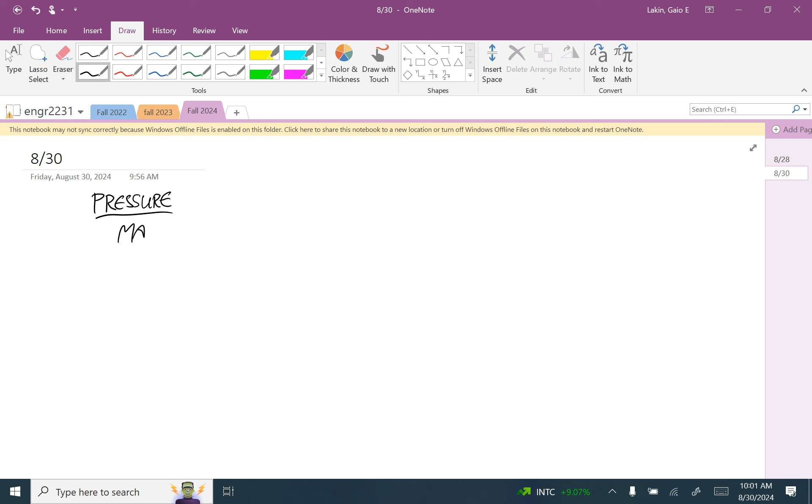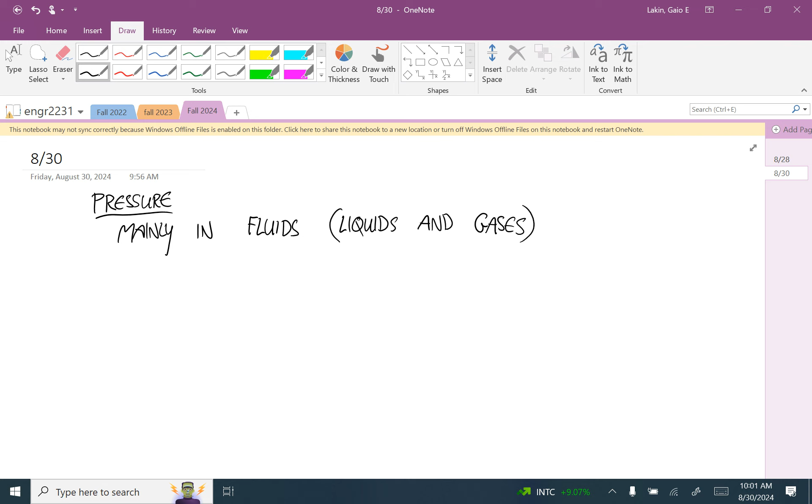Okay, pressure. So when we talk about pressure, this is mainly in fluids. And when I talk about fluids, I'm talking about both liquids and gases. And pressure is the force divided by the area that's applied perpendicular to any surface.

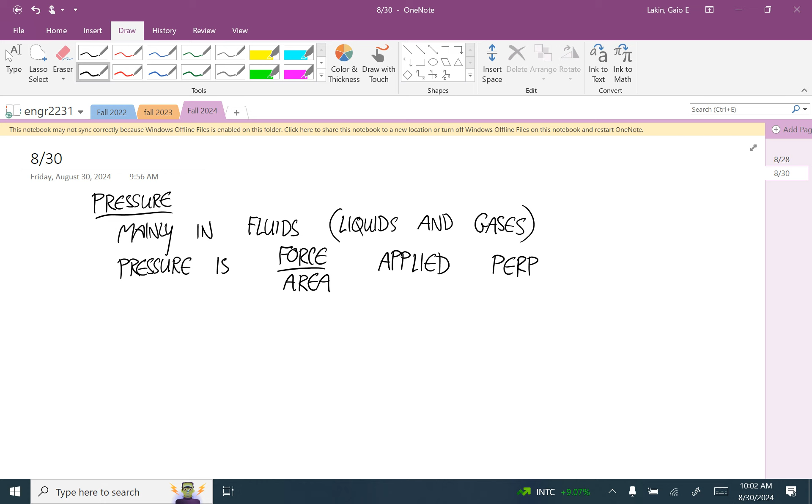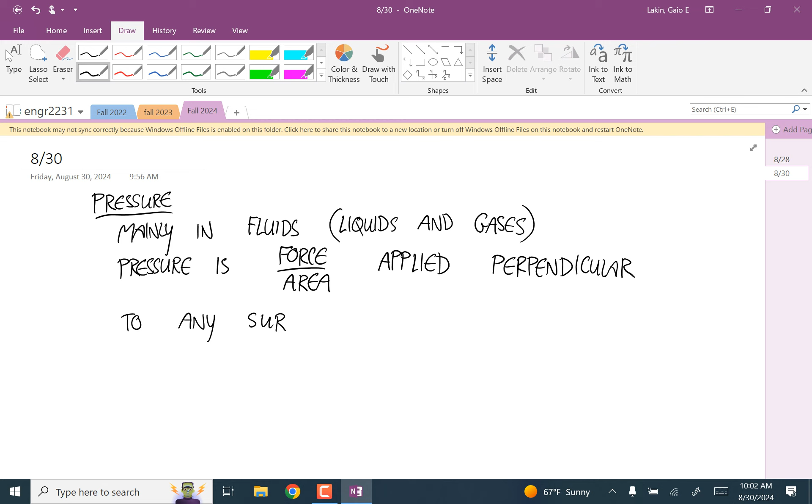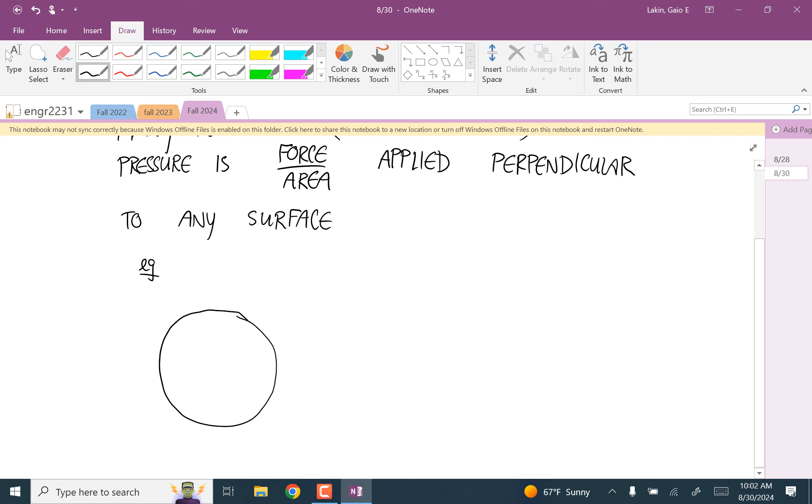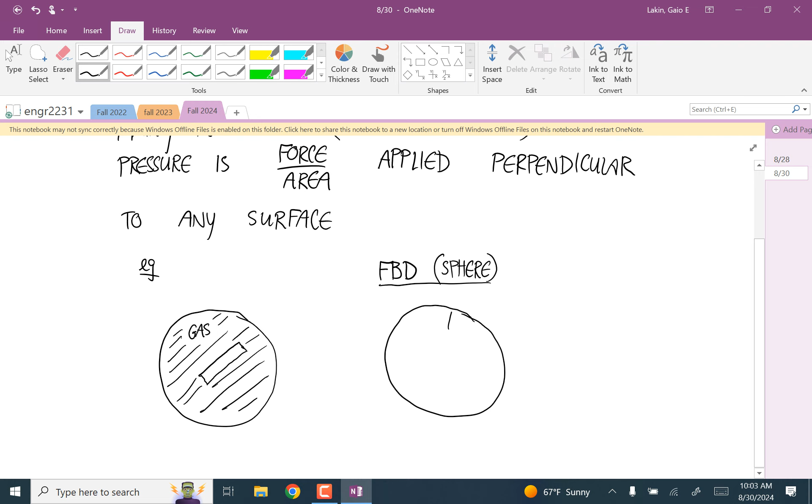So, for example, if you had a pressure vessel, like a spherical pressure vessel with a gas in it, and then inside you had an object like that. Okay, so the gas is all this here. Then a free body diagram of the sphere would look like this. At every point, that pressure is pointing perpendicular to the surface.

And if you looked at a free body diagram of the object that's inside there, the pressure is applying forces perpendicular to every one of those surfaces like this.

You have kind of this vague sense that pressure can be a force or suction can also be a force, but you need to start getting your mind used to the fact that all there is are differences in pressure, and all pressure can do is push on things. There's no such thing as suction. It's just differences in pressure.

So if you imagine sucking the air out of an empty plastic pop bottle, you feel like you're sucking the sides in. But what you're really doing is, when it's sitting there, it's in a tenuous equilibrium that comes from atmospheric pressure pushing in on the sides and the atmospheric pressure inside pushing out.

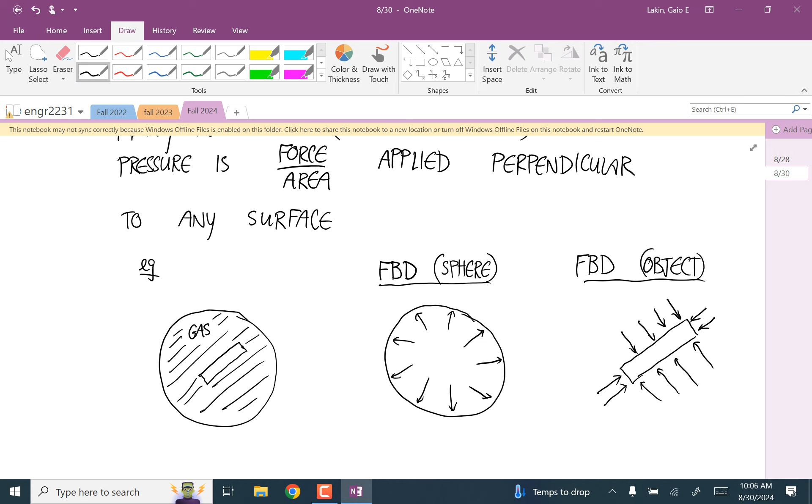Okay. Same thing with if a door blows off an airplane or a window or something. So in order for people not to die in airplanes, they pressurize the cabin. They don't pressurize it all the way to ground atmospheric pressure, but that pressure is a lot higher inside the plane than outside. And so if a door flies off, all of that high pressure air inside wants to get outside, and that's what takes things and people out the door of an airplane.

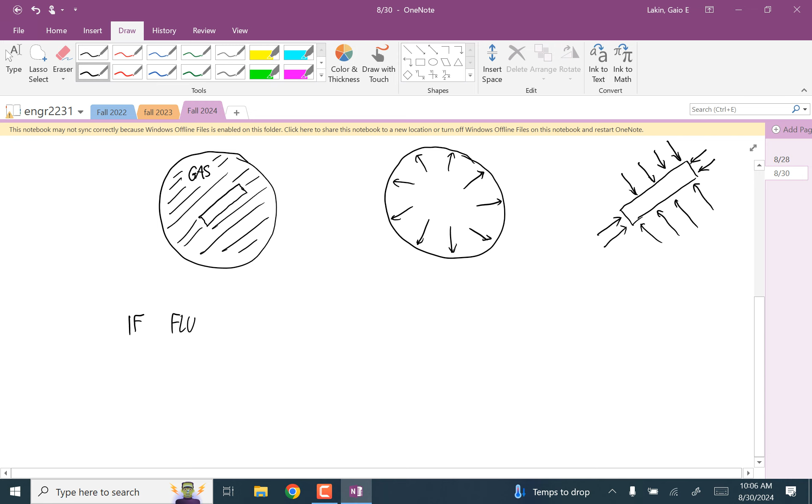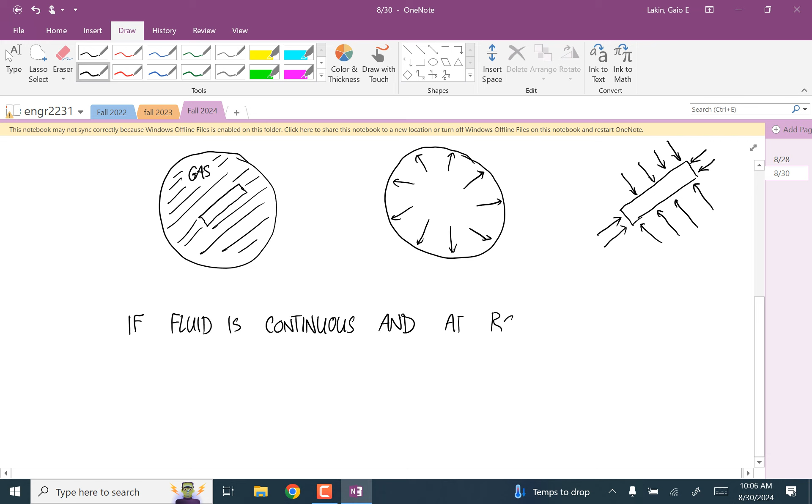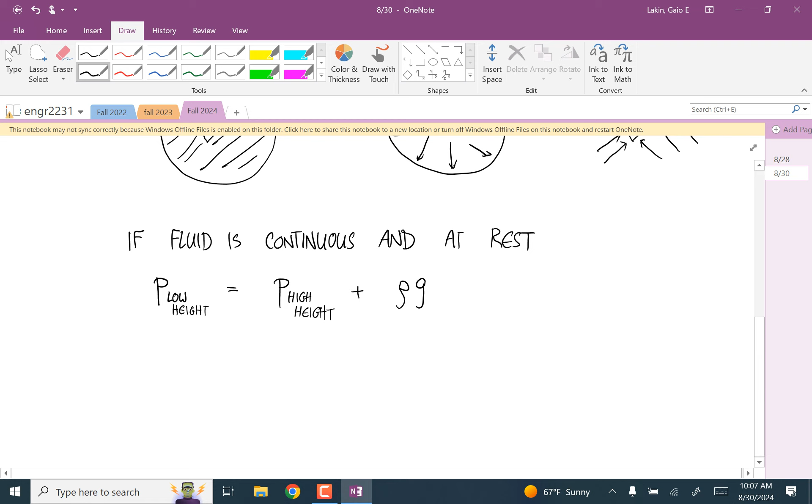If a fluid is continuous and at rest, you can calculate the pressure due to a change in height this way. So the pressure at the lower height is equal to the pressure at the higher height plus the density of the fluid times g, 9.81 meters per second squared, times the depth. I'm calling it h for height.

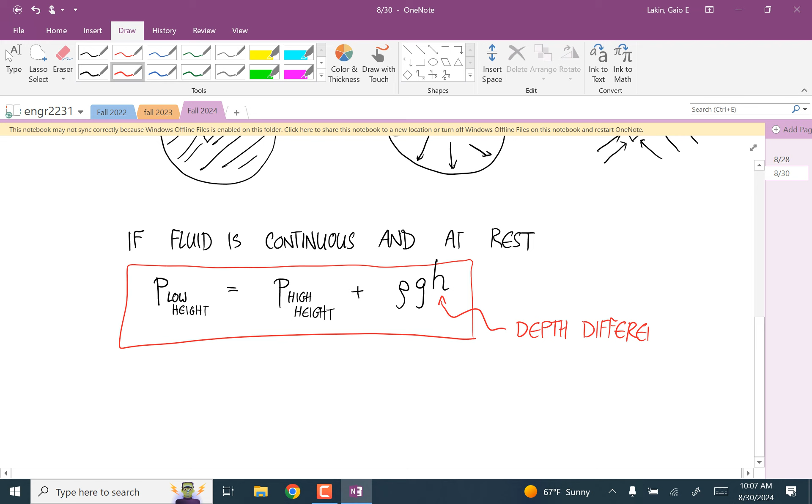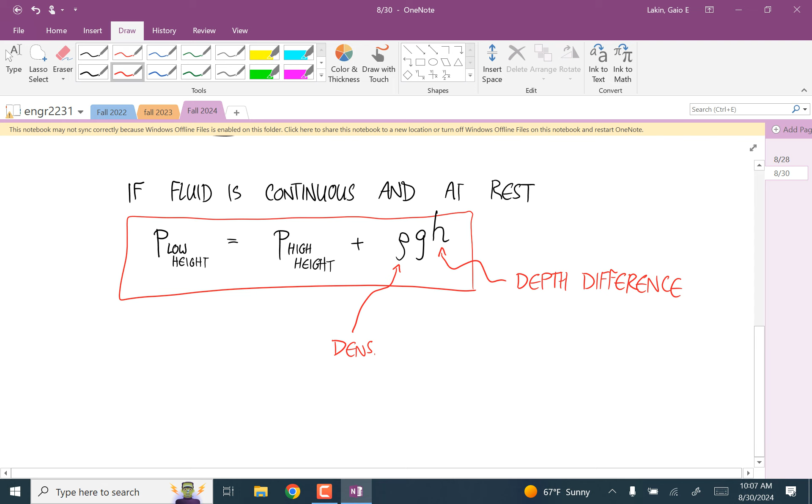So this rho is the density of the fluid. That's the mass divided by the volume. And g is 9.81 meters per second squared if you're on the surface of the Earth; that changes a little bit as you get farther away from the Earth.

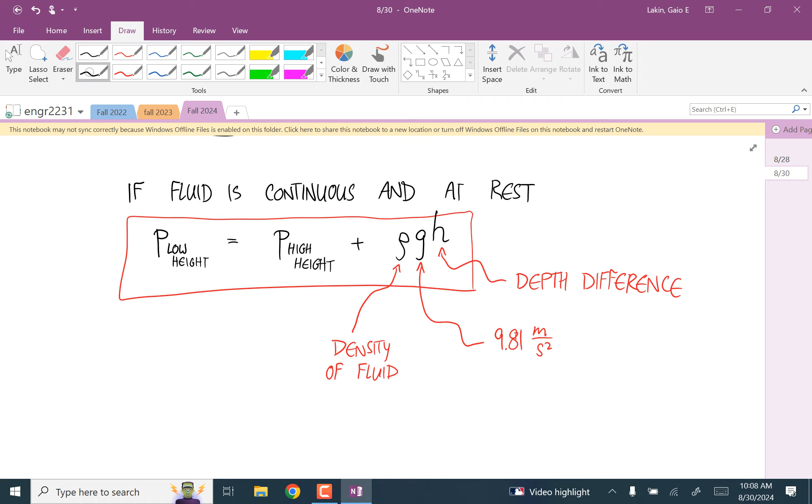One thing to notice about this equation is that it's easier to use with liquids than with gases, because liquids are usually nearly incompressible. We're going to make that assumption a lot, that liquids are incompressible. And what incompressible means is that density doesn't change no matter what the pressure is. So the density is constant despite pressure changes.

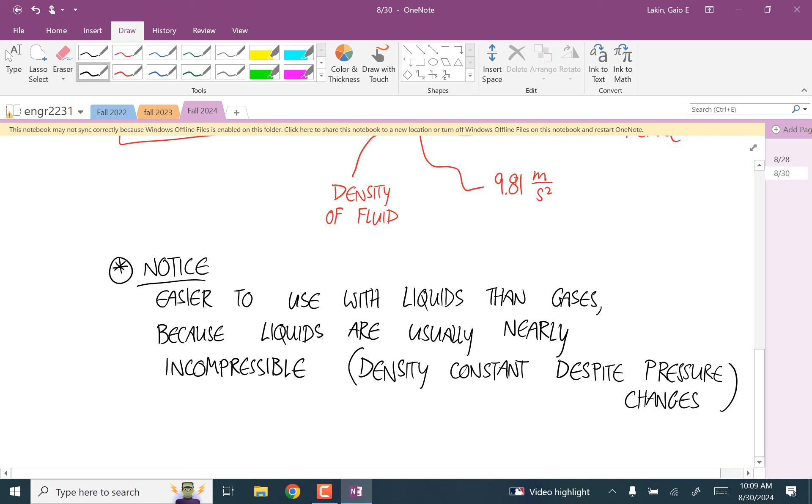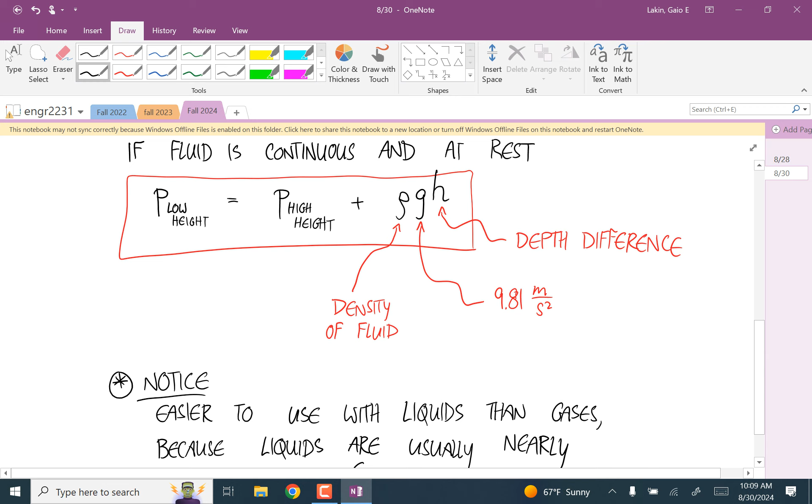Gases are not incompressible at all. It's very easy just with the pressure you can apply with your hands. You can imagine if you have a gasket-sealed syringe with a gas in there, you can easily compress it to a smaller volume, which changes the density. And so if you're trying to use this equation with a gas, that density is going to change and you're going to have to do it using calculus. But with liquids, it's really easy.

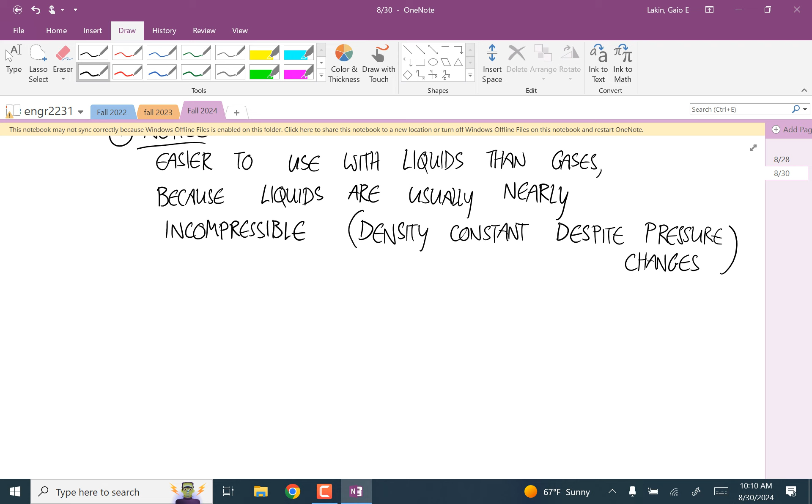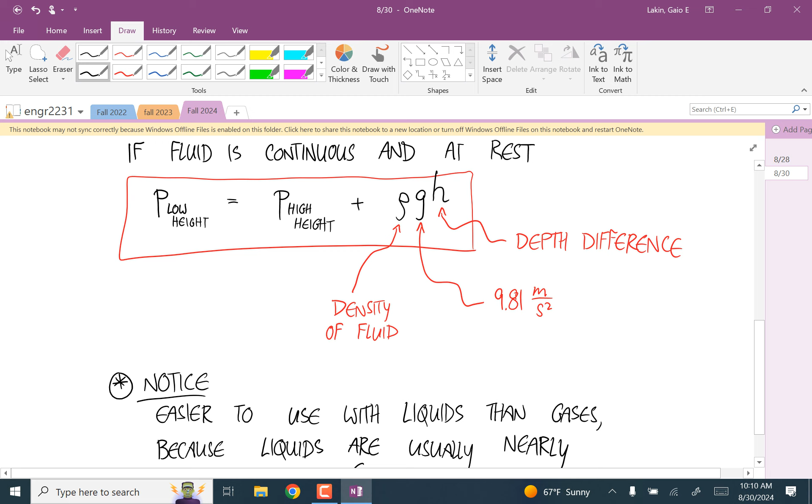All right, I want to ask one question just to make a quick point that I think is important to keep in mind always in your engineering classes. So here's the equation. It says that just based on the height difference between two points, if you know the density, you can calculate the pressure. Why doesn't this hold for these two cases?

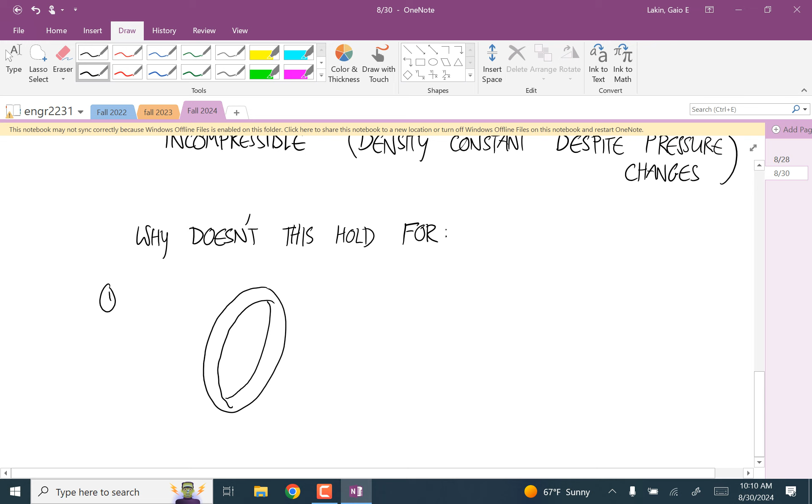So the first one is, you know, like imagine a bike inner tube that's inflated. There's the valve. So in here, you have a very high pressure. At the same height here, you have a relatively much lower pressure. That doesn't look like it makes sense with this equation, but why doesn't it work here?

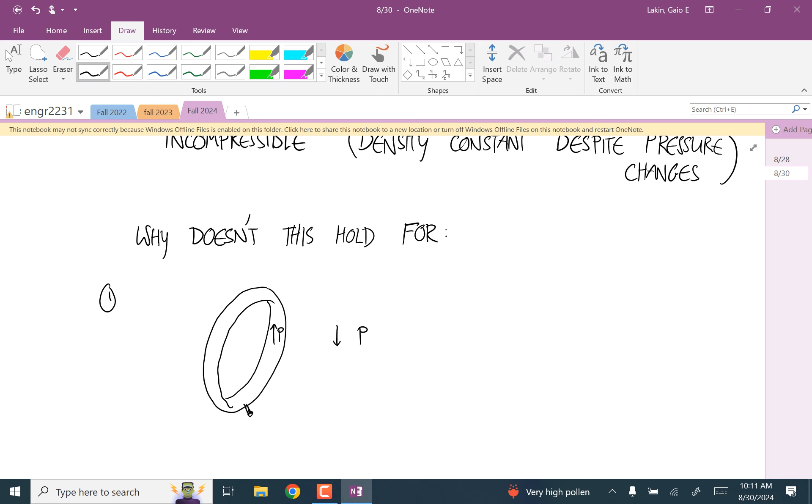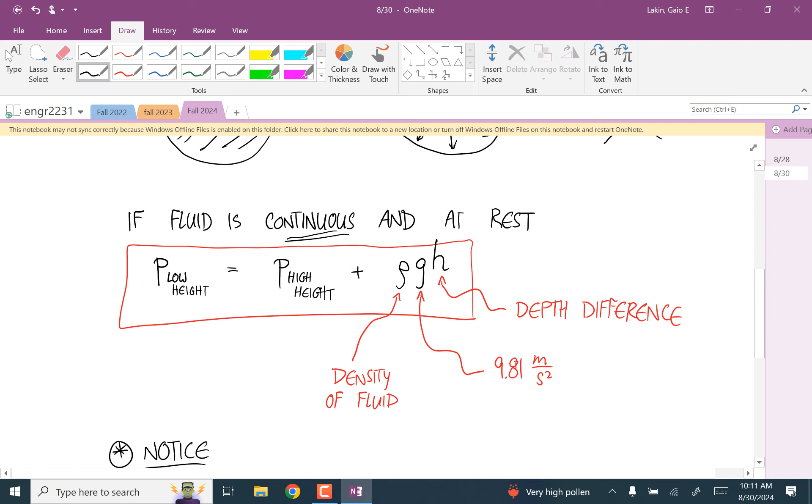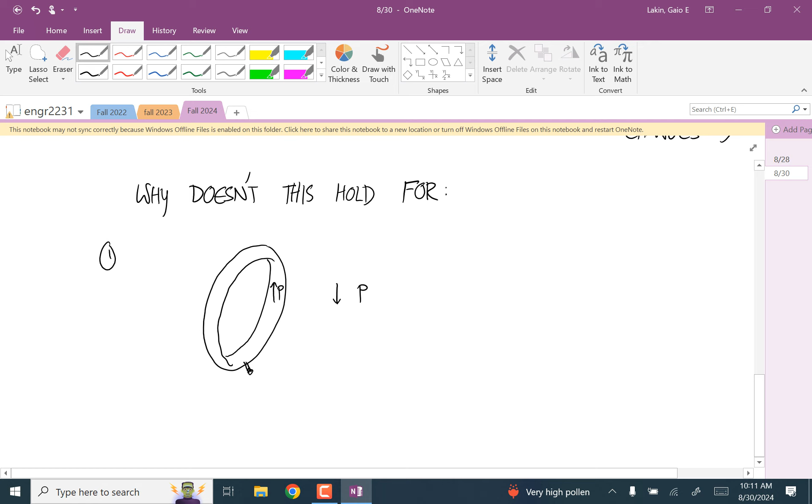So just remember that with any equation, the key is in the details. Don't just apply this equation, or I guess any equation that you're using; be sure you know when it works and when it doesn't. The fluid has to be continuous for this to work, and so the fact that there's this barrier of an inner tube in between means that it doesn't hold. Okay.

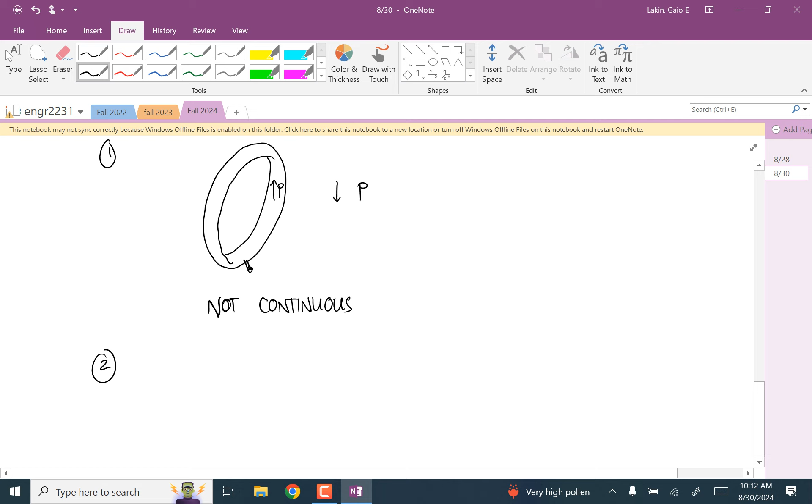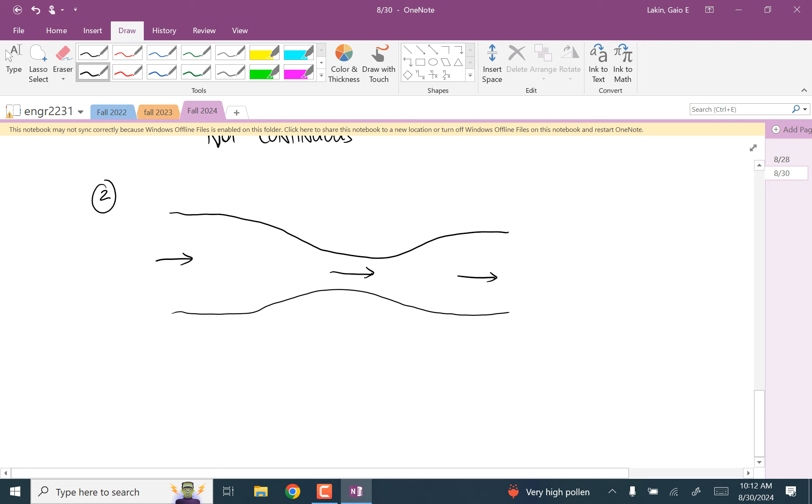And so the second one, if the first requirement is that it be continuous and the second requirement is that it be at rest, why doesn't it work in this case where you have a fluid moving through a tube with changing dimensions? You have a high pressure here, a low pressure here, even though the height doesn't change.

Because the velocity would change. Yeah, and the velocity doesn't even have to change. Just the fact that this fluid isn't at rest means that you can't use this. But in this case, yes, the velocity would be changing too. Okay, so let's see this work.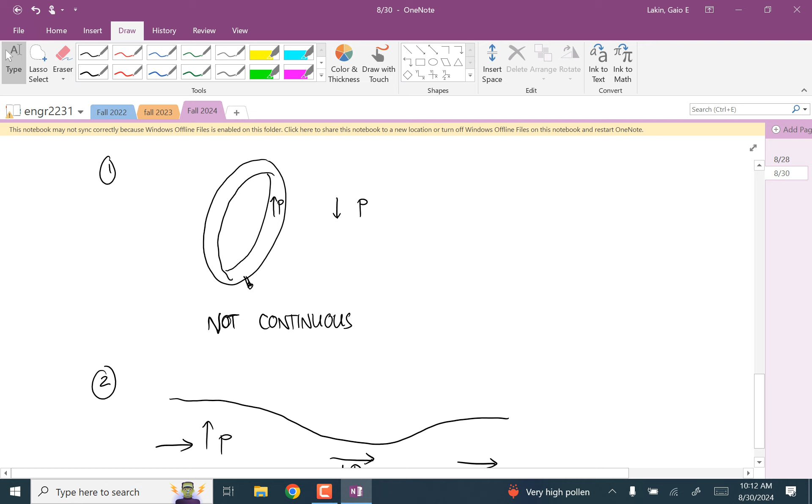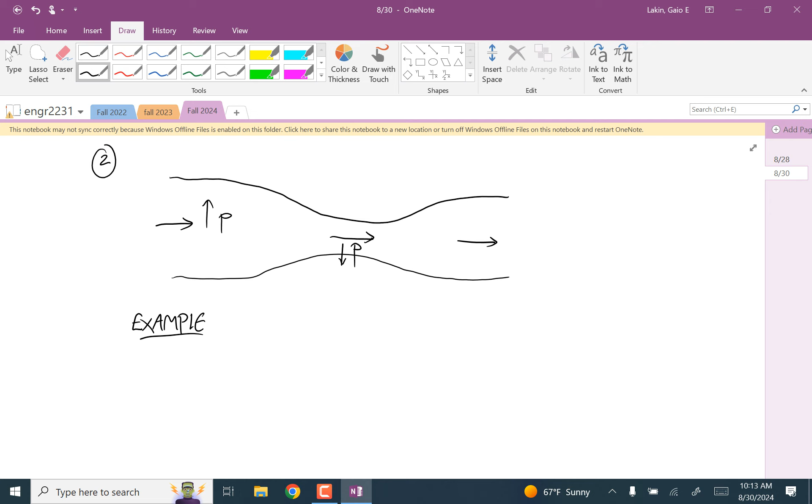I first did this example when I was teaching this class right after the, remember the Titan submersible implosion. So let's just calculate the pressure and stuff. Before I do that, just erase example with my electronic pencil.

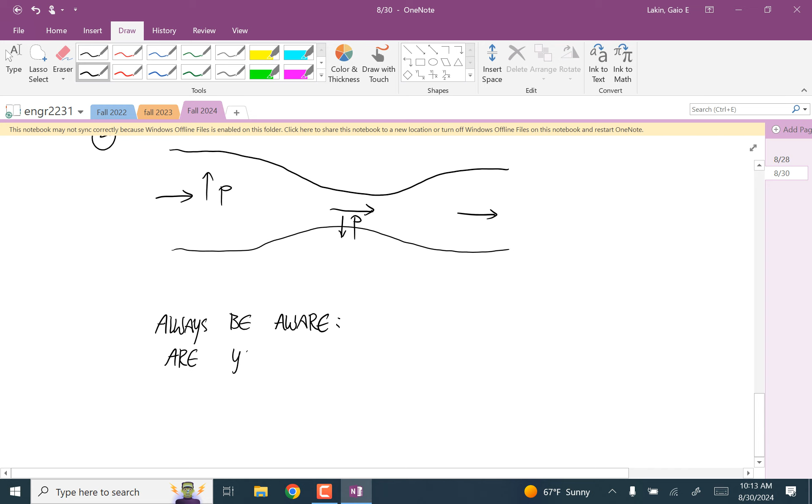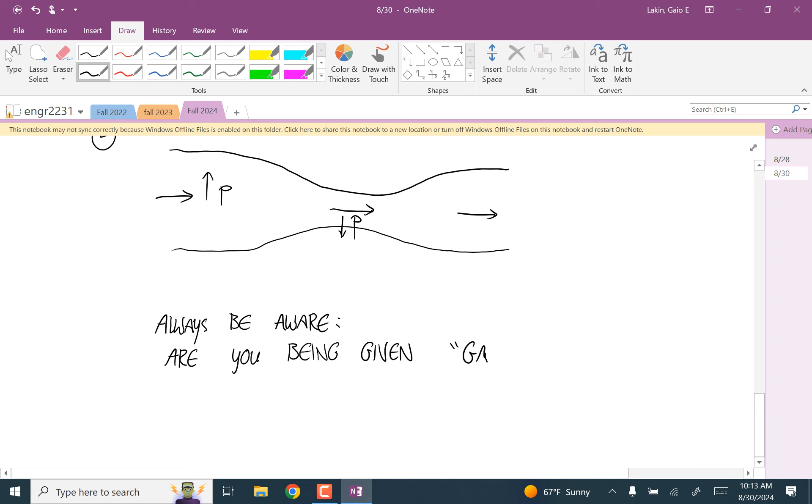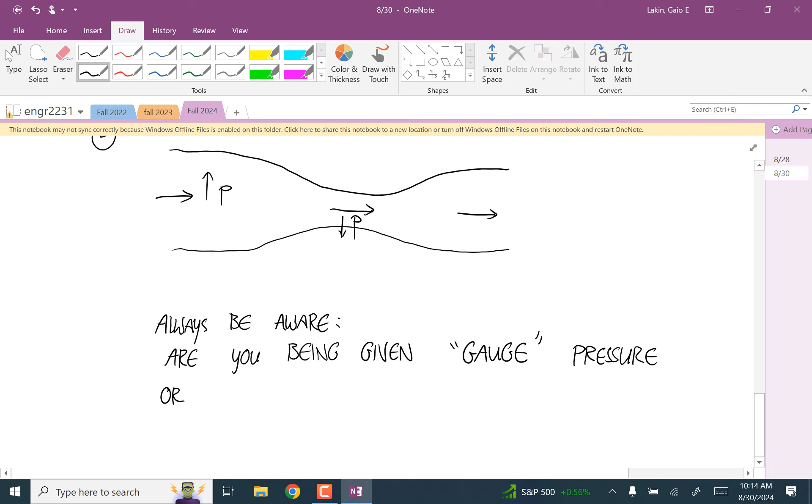Always be aware: are you being given gauge pressure? How do you spell gauge? G-A-U? Gauge pressure or absolute pressure? In this class, for our calculations, we're always going to want the absolute pressure.

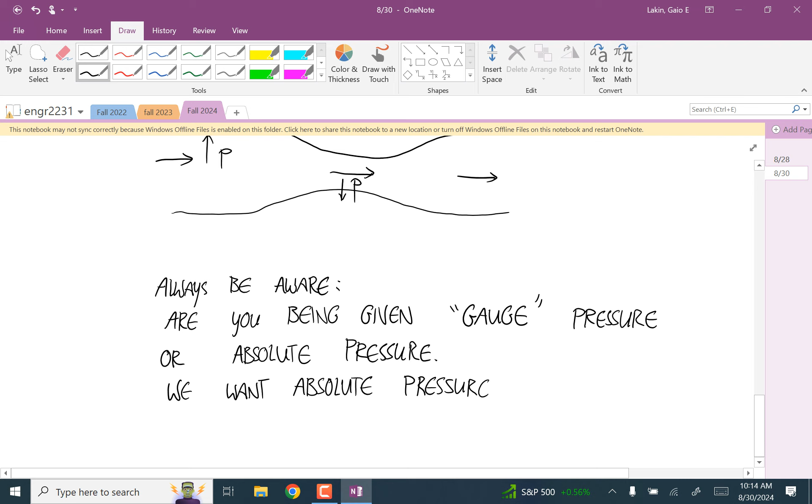And the relationship is that gauge pressure, well, let me write it as the absolute pressure is equal to the gauge pressure plus the atmospheric pressure. So gauge pressure is just how different you are from atmospheric pressure. Like a tire gauge measures things naturally in gauge pressure because all it can tell is the difference between the pressure inside the tire and the pressure in the air.

And so anytime you're given a pressure in gauge pressure, you want to add the atmospheric pressure to it to get the absolute. Okay, now example. So let's treat this Titan submersible as a stand-in. We're just going to have a 1 meter cube box, and it's going to be hollow.

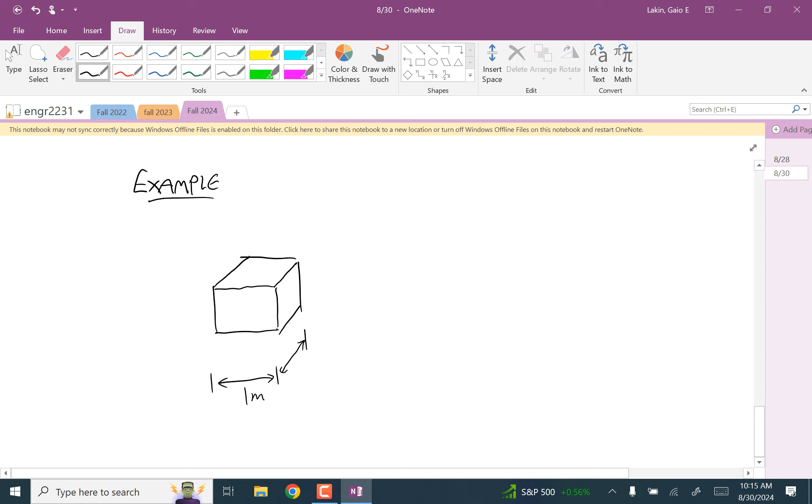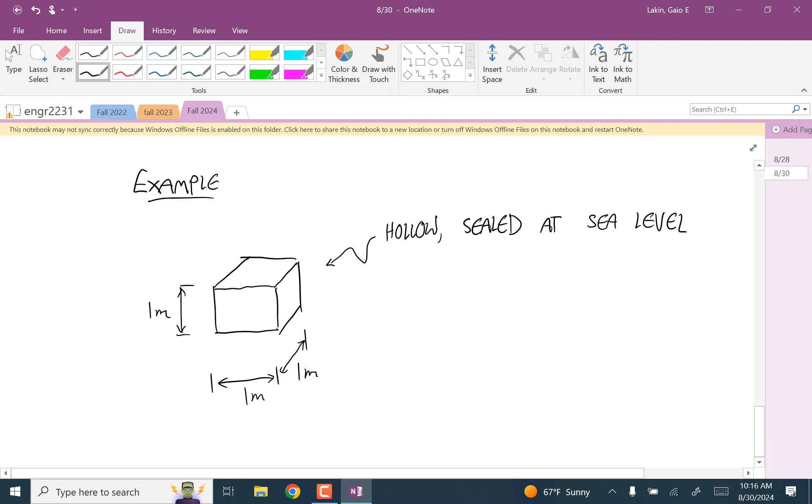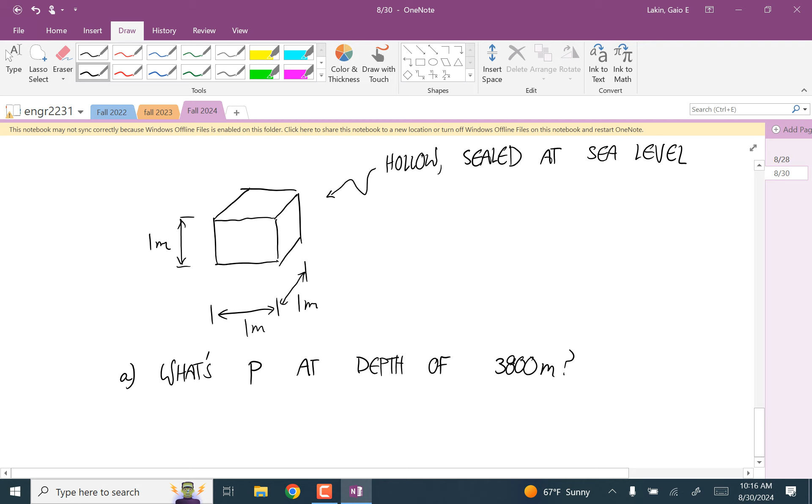And it's sealed at sea level, which means that the pressure inside the box is atmospheric pressure. Okay. And we want to calculate, so first, what's the pressure at a depth of 3,800 meters? How many times atmospheric pressure is that?

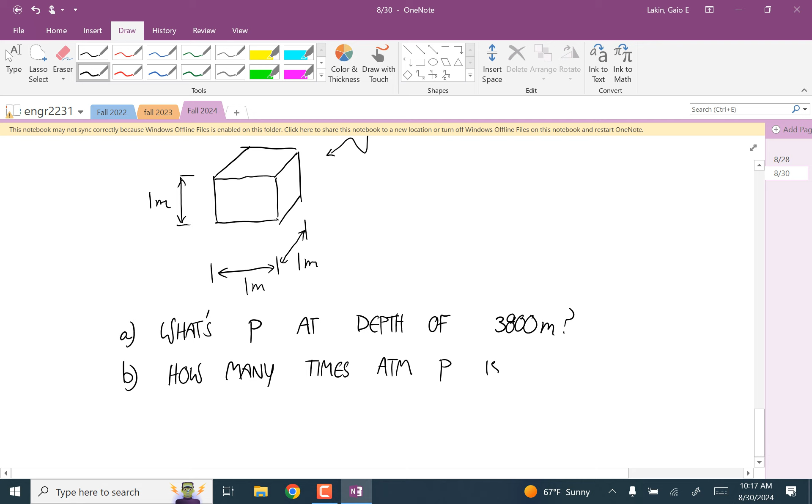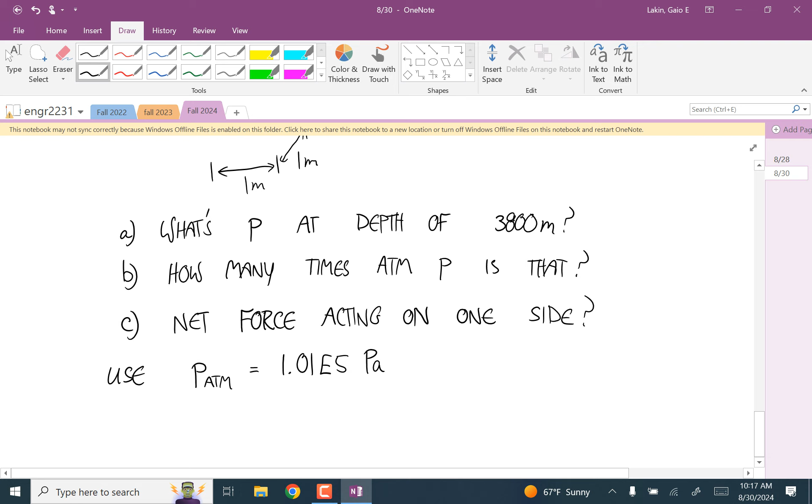And then we want to calculate the net force acting on a single side. And we're going to use that atmospheric pressure. Standard atmospheric pressure is 1.01 times 10 to the 5th pascals. The atmospheric pressure fluctuates some around that, but that's usually at sea level what the pressure is.

And for the density, well, I guess we'll use the density of fresh water, even though this is the ocean. I don't have the density of salt water written down, but the density of water is about 1,000 kilograms per cubic meter. So is the ocean higher or lower? It's higher. Because the salt is denser than water.

And actually, this is an interesting fact. I was surprised to hear this. I would think, okay, if you have a speedboat and you're going as fast as you can in fresh water and seawater, maybe the salt increases the friction a little bit, and so it would be faster in fresh water than seawater. It's actually the opposite.

Maybe in physics 1, you talk about buoyancy force. The denser a liquid is, the higher a floating object sits in it. And so in seawater, a boat sits higher in the water. Not as much of it is underwater. So you have less friction because of that higher seating in the water. And so boats actually go noticeably faster in seawater than they do in fresh water.

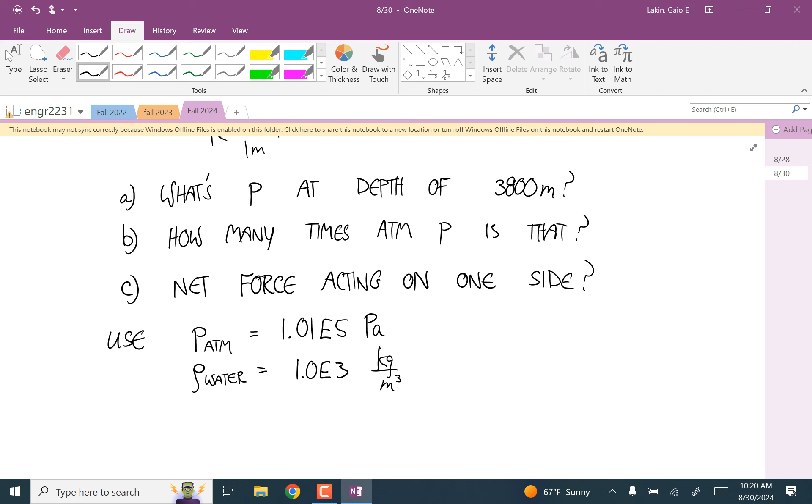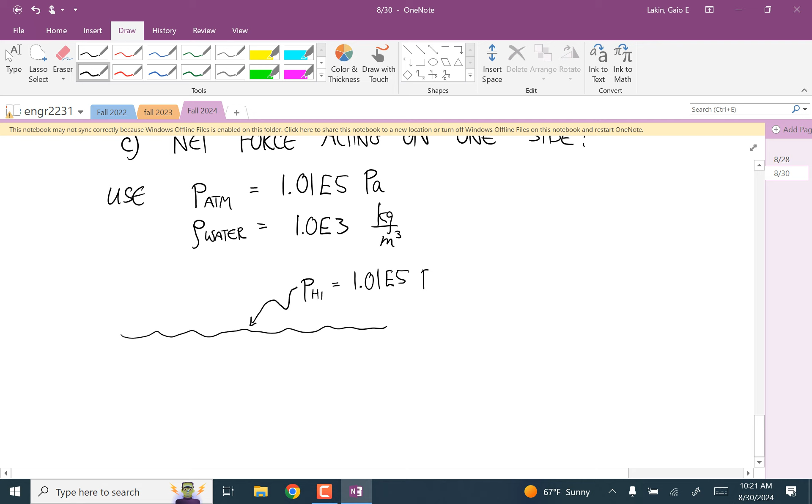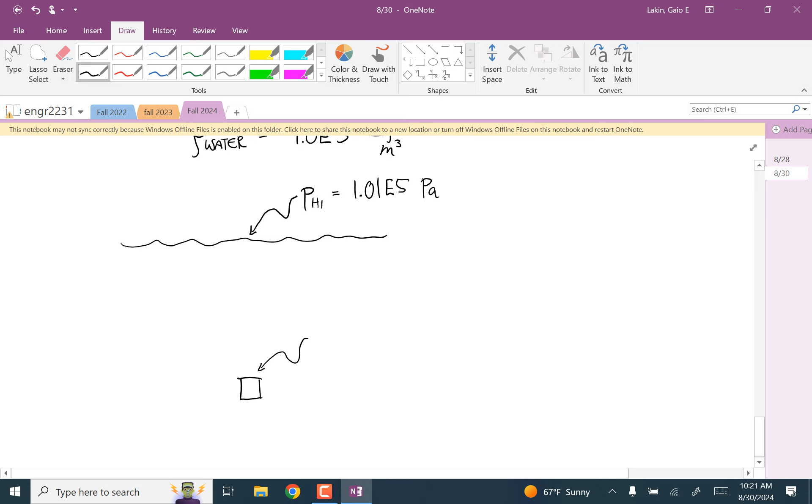Okay, but we're going to use these values. And so there's the surface of the ocean. This is the pressure at our higher point, and this is just atmospheric pressure, so this is 1.01 times 10 to the 5th pascals. And then way down under the water is this box. That distance is not drawn to scale. And this is our P at the lower height.

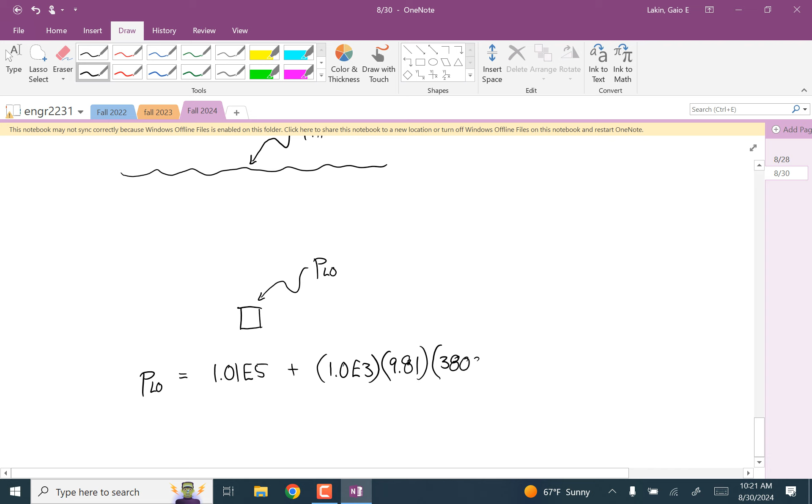And so this equation says the pressure at the lower depth is equal to 1.01 times 10 to the 5th plus 1 times 10 to the 3rd, the density of water, times 9.81 times the depth, the difference in height, 3,800 meters. And so the absolute pressure at that lower point is 3.7 times 10 to the 7 pascals.

How many times atmospheric pressure is that? So we're just going to take 3.7 times 10 to the 7 divided by 1.01 times 10 to the 5th. And this is about 366 times atmospheric pressure.

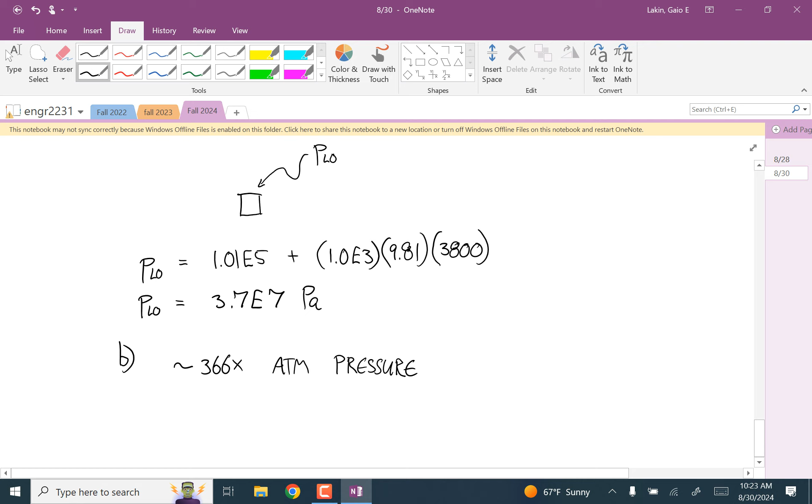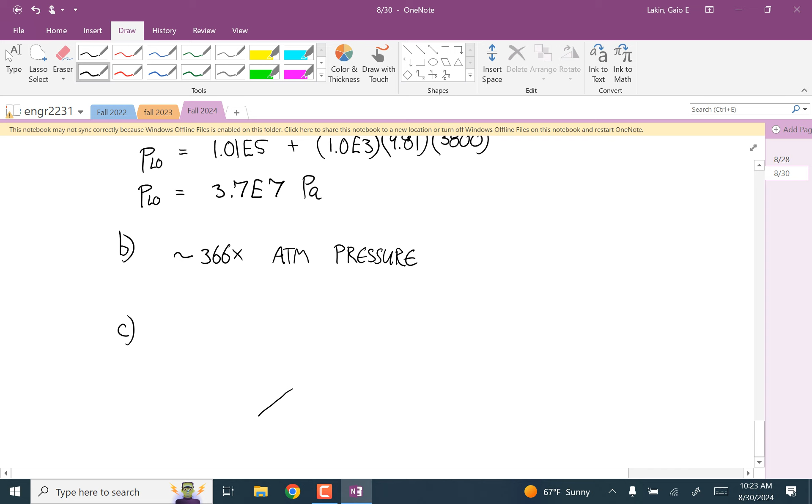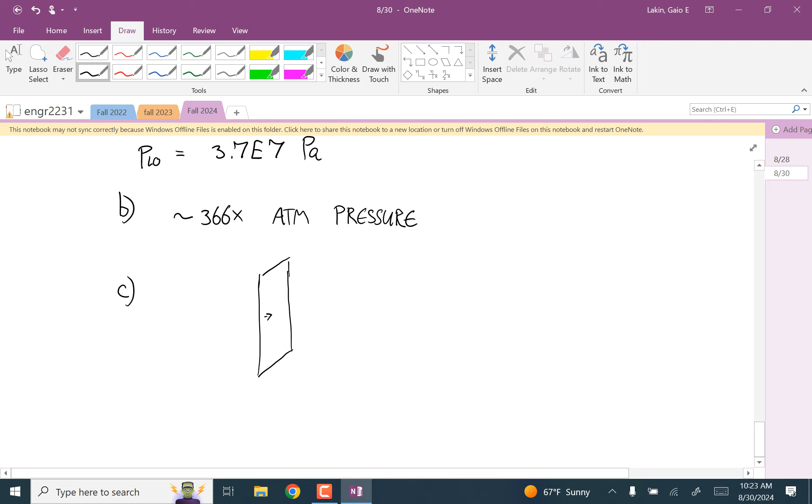Okay, so now we're going to think in terms of forces. So let's think of the wall on the right side. What forces are acting on this? There is a force coming from the pressure on the inside going that way, and there's a force pressing this way from that outer pressure. This force that atmospheric pressure is applying, trying to blow this thing outwards, is still going to be a really big force. So I'm going to call this force from the inside positive, and this one negative.

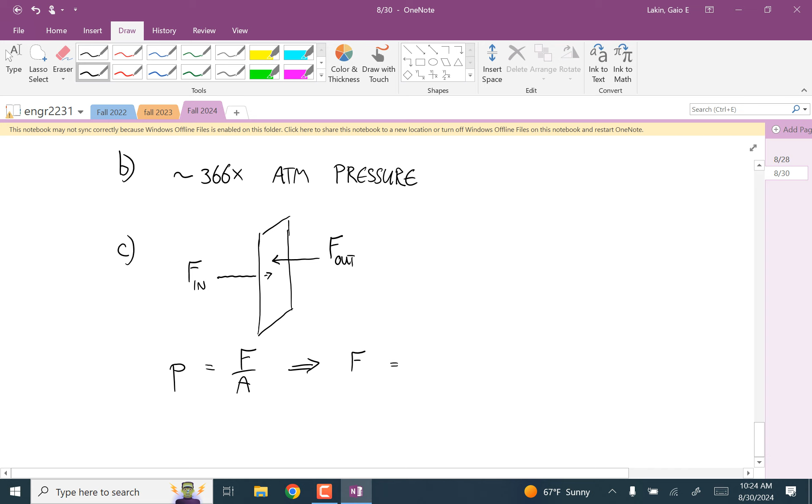Yeah, I'll do that. So remember that the definition of pressure is the force divided by the area. So you can turn that around and say that the force on this wall is equal to the pressure times the area. And so F in is 1.01 times 10 to the 5th times an area of 1 meter squared. So we have 1.01 times 10 to the 5th newtons. That's a lot. That's about 25,000 pounds of pressure.

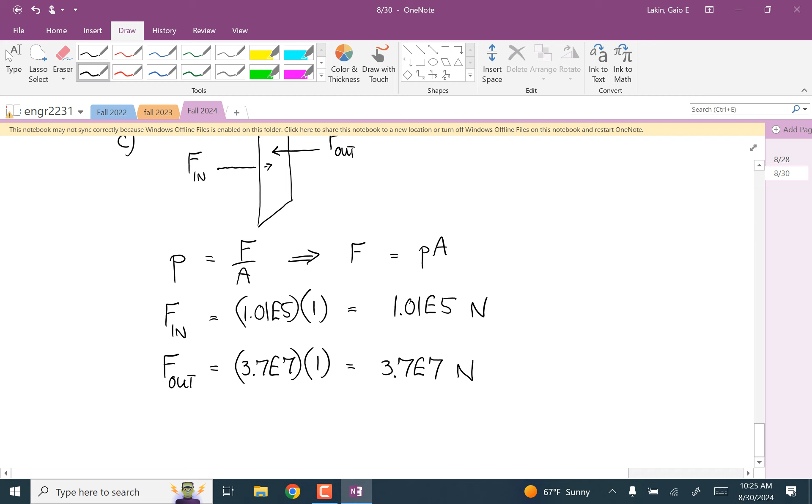And now the force from that outer pressure is equal to 3.7 times 10 to the 7 times 1 squared, so 3.7 times 10 to the 7 newtons. And so the net force pushing in on this wall is 3.7 times 10 to the 7, call that negative, plus 1.01 times 10 to the 5th, and you get basically 3.69 times 10 to the 7 newtons pushing in. You mean two? No, because we're adding. Oh, got it.

So what we have is a tug of war between these two forces. Well, the opposite of a tug of war. It's a pushing contest between these two forces, and one of them is 370 times bigger than the other one. And so the result is 37 million newtons of net force pushing in, which explains why it's such a major engineering undertaking to make a vessel that can withstand these forces.

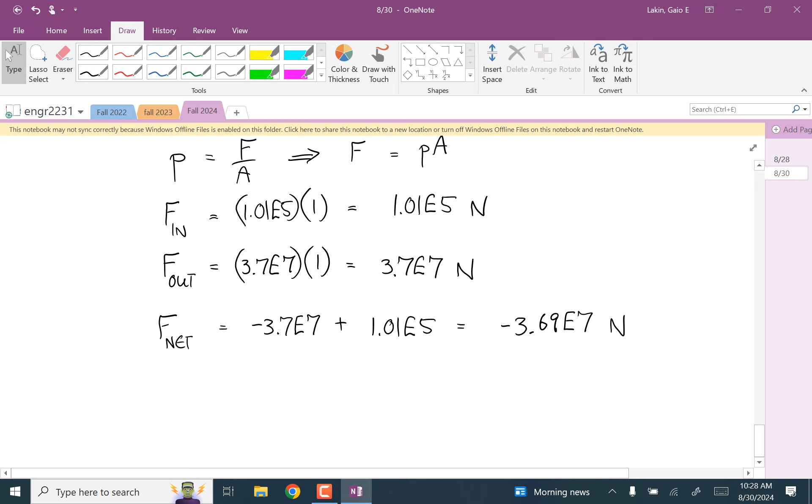And so whatever the sealed pressure in the vessel is, that's the force being applied in every direction. Yeah, perpendicularly at every point. Well, it's not the force. Imagine a round thing, and simplify it by turning it into tiny hexagons like a soccer ball. On each hexagon, the force pushing out is perpendicular to the face, and its magnitude is the pressure times the area. It's easier with simpler shapes like squares. With spherical or cylindrical things, you'd have to use three-dimensional calculus.

What would change that to where pressure is not being exerted evenly on all surfaces? If there's an object inside the box? The magnitude of the pressure is the same, but the direction changes as the perpendicular direction changes. That's what makes it complicated on a spherical thing. But nothing changes the magnitude of it, as long as the fluid is at rest in there. If there's fluid flow, it gets more complicated.

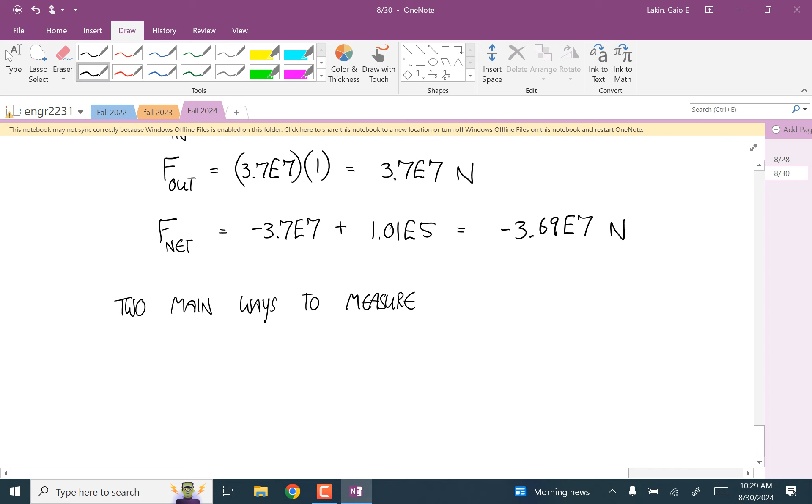Okay, any questions about that? There are two main ways to measure pressure. The first one is called a manometer. And that's used to measure the pressure of an enclosed fluid.

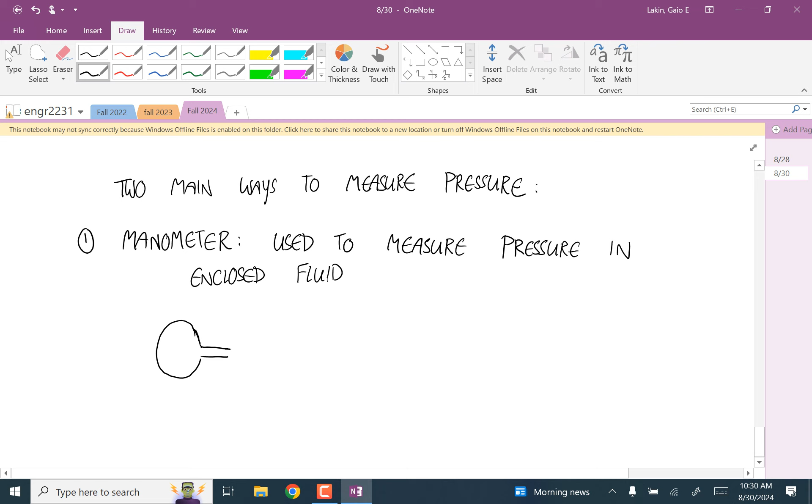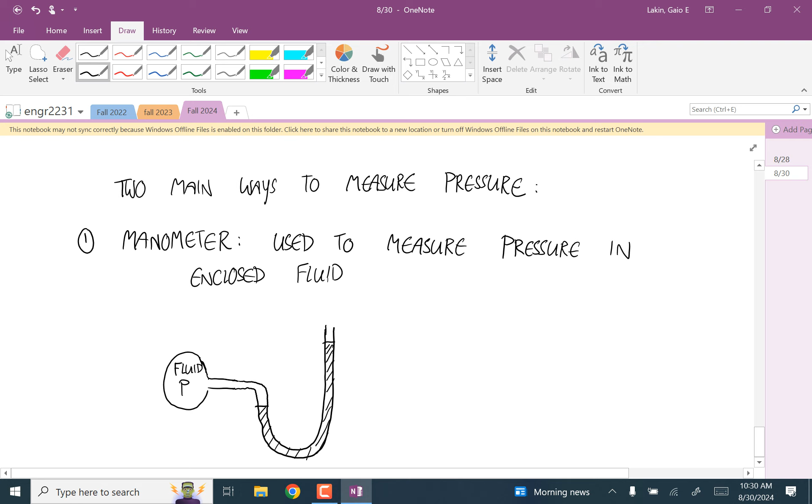So there's a reservoir over on the left in this, and then a tube like this. And inside the tube, you have a liquid with a known density. This can be water. Mercury is used pretty often. Alcohol is used. Over here is the fluid whose pressure you're trying to measure. The shaded area is a different liquid. And at the top, this is open to the environment, so this is atmospheric pressure.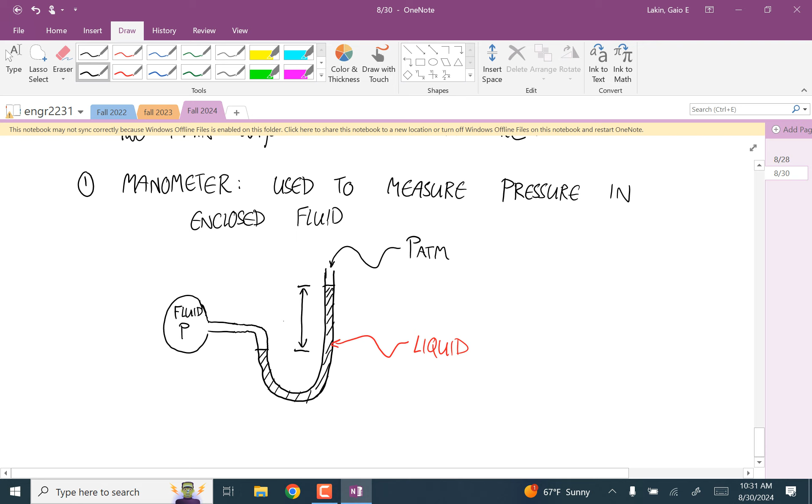And this difference in heights here is what we're going to call H. And so the pressure in the enclosed fluid is equal to atmospheric pressure plus the density of the liquid times 9.81 meters per second squared times H. So this is a setup that you use if you want to measure the pressure in a fluid that you have contained.

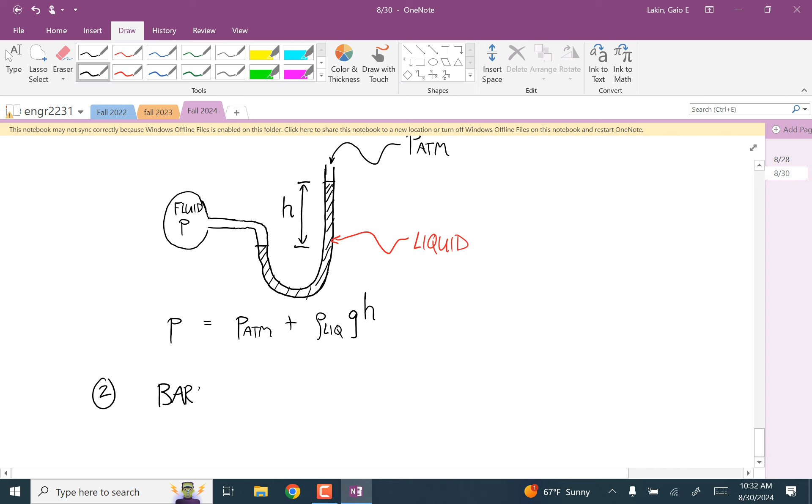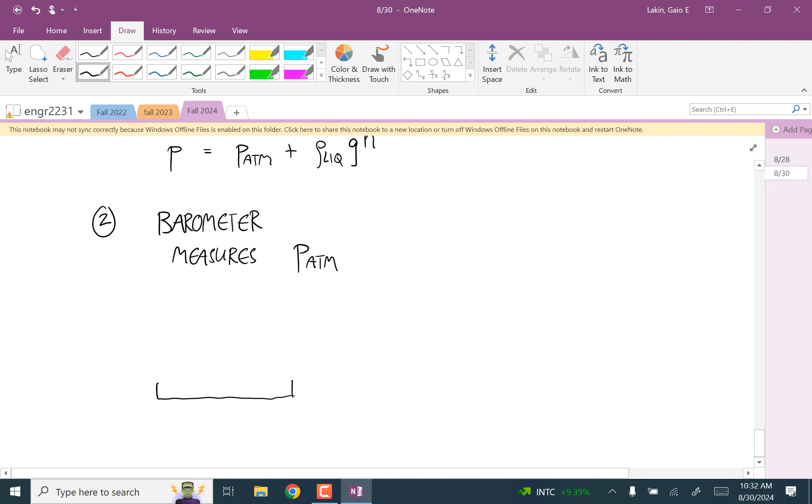The other common device for measuring pressure is for measuring atmospheric pressure. That's a barometer. So this is used to measure the atmospheric pressure. And this is a 2D drawing of a three-dimensional thing. You can imagine this basin here. If you look from above, this has like a round or a square cross-section, and you just have a liquid in this basin.

And then this liquid can climb up this enclosed tube, and it'll climb some distance up this. And this tube is sealed off from the atmosphere. The only pressure you have in here is the vapor pressure. That's the pressure of molecules that are leaving the liquid. It's basically like a boiling pressure, although this is below its boiling point. But if you think of what happens in boiling, molecules at the surface get enough energy that they fly out of the liquid. That's what causes a vapor pressure here.

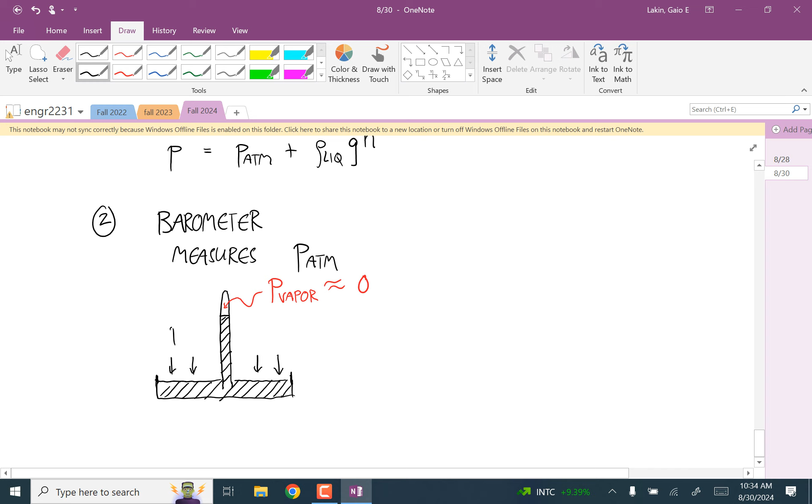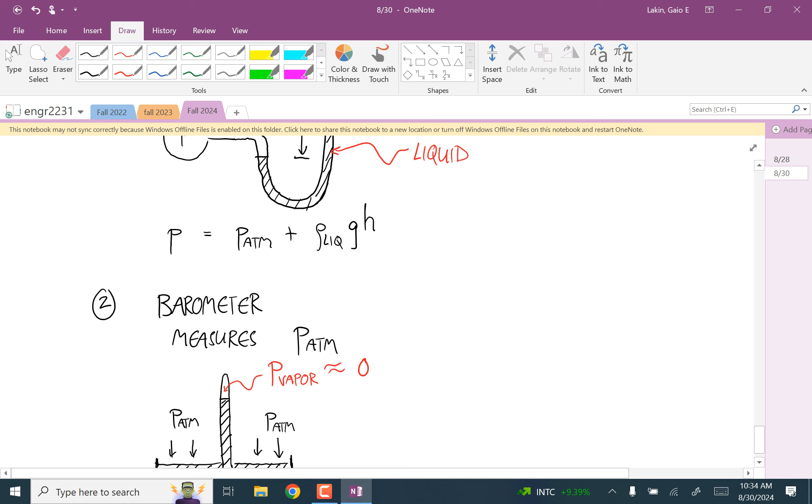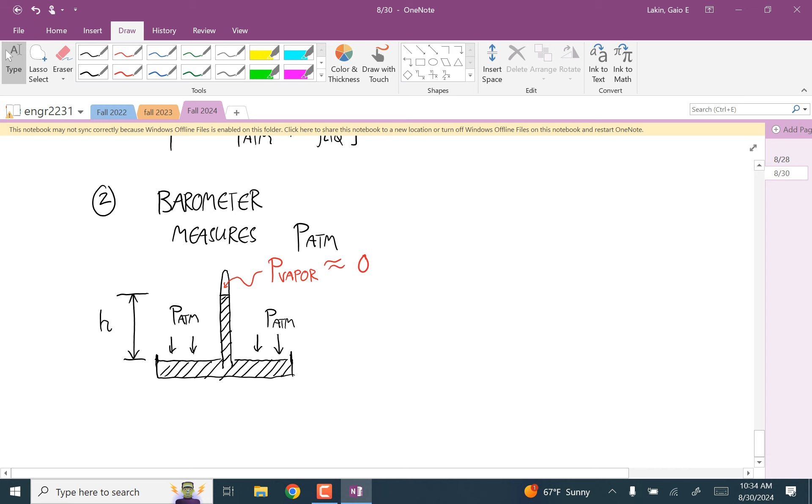But people purposely use a liquid with a low vapor pressure that's close to zero. So usually you can just approximate this as zero. Pushing down on the liquid in the basin is that atmospheric pressure. And the distance h in this case is the distance between the liquid level in the basin and the liquid level in the tube. And so P atmosphere is just equal to the density of the liquid times 9.81 meters per second squared times that height.

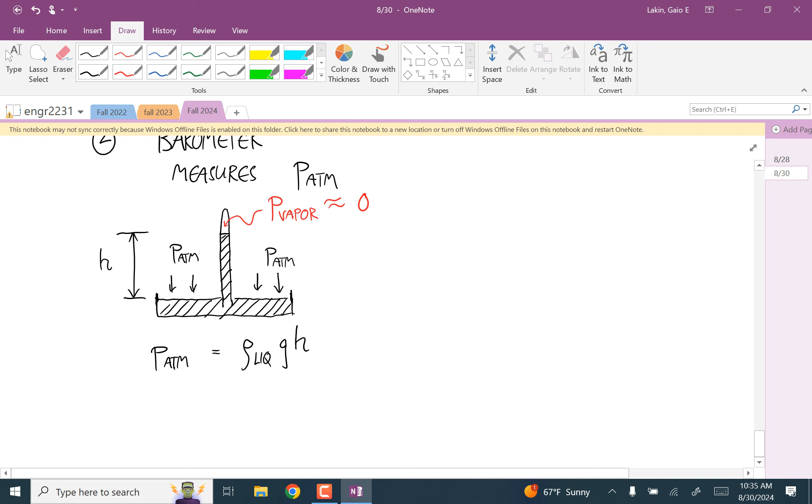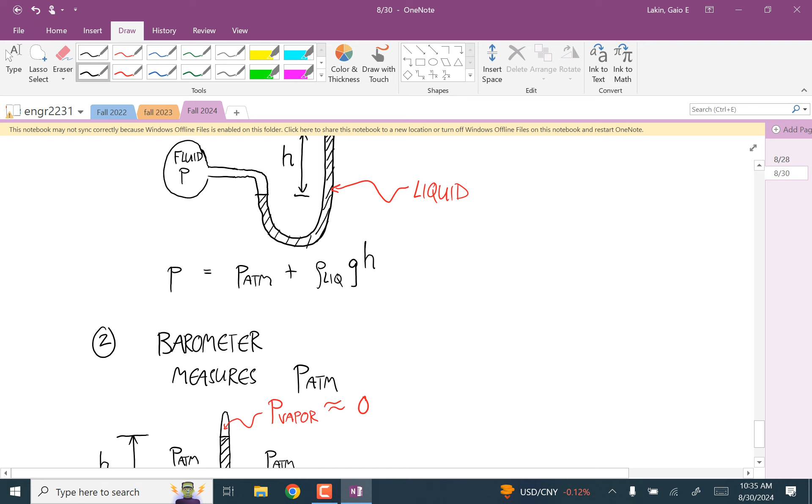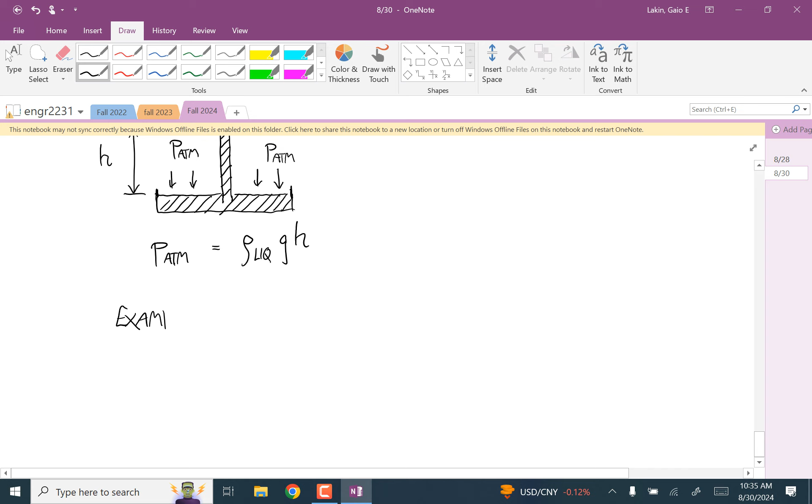And so if you want really accurate measurements of the pressure of an enclosed fluid, you probably want to have a barometer in that room in addition to the manometer so you can get an accurate reading of the pressure in the room where you're using the manometer. Okay, because it comes into the calculation too. Okay, let me do a quick example problem. And then I'll stop and we'll do the quiz.

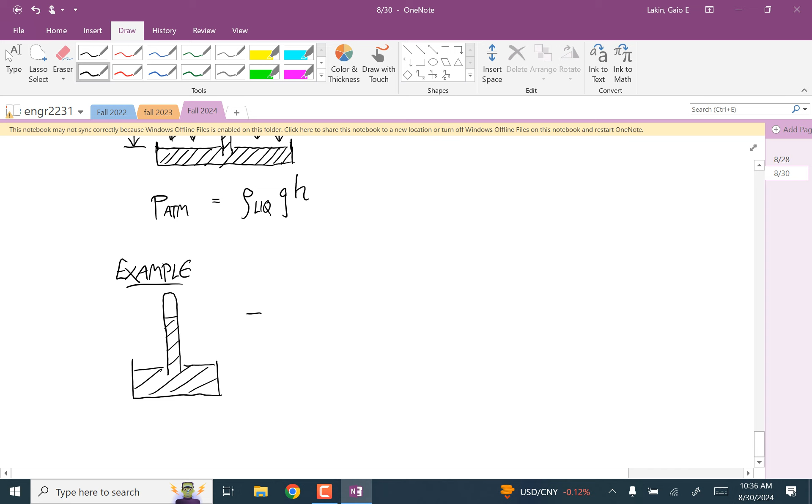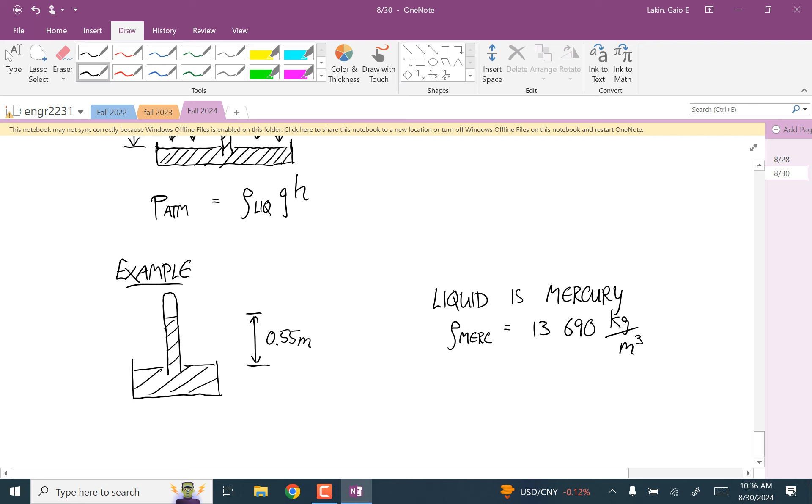So let's say that we have a barometer, and let's say that we measure the height difference in this liquid as 0.55 meters. And the liquid that we're using is mercury. That has a density of 13,690 kilograms per cubic meter. That's pretty high. Steel is only 7,000. This is twice as dense as steel. And we want to know what the atmospheric pressure is.

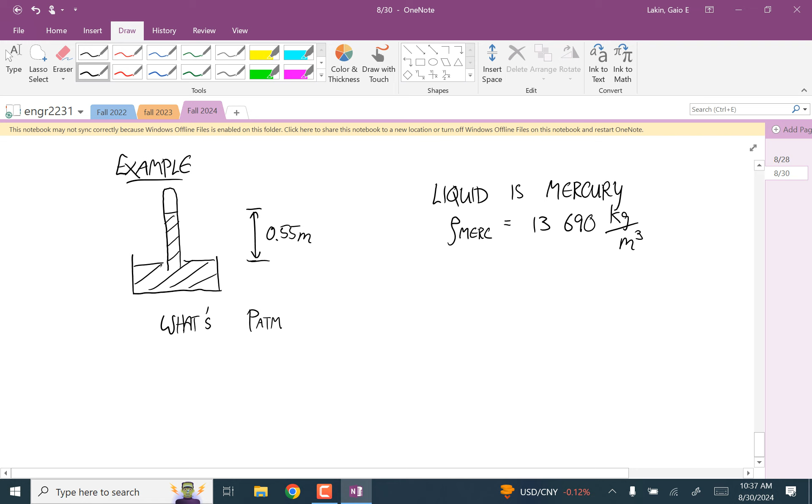And so we have that the atmospheric pressure is the density times 9.81. I'm just doing everything in SI units. Times 0.55. And you get 73,864 pascals. Quite a bit lower than standard atmospheric pressure. Maybe this would be a pressure that you would take at a pretty high altitude. In a storm? I don't think it goes that low in a storm, but yeah, it does definitely change. Changes in pressure correspond to storms, yeah, right, exactly.

Is an extremely high atmospheric pressure the sign of a tornado or an extremely low one? I do not know. I think part of what causes it is the difference. I think for weather to come where you are, you always pretty much need to be at a low pressure because otherwise your high pressure keeps everything else away from you. So my guess is that it's a low pressure that sucks those winds towards you, but I'm not really a meteorologist.

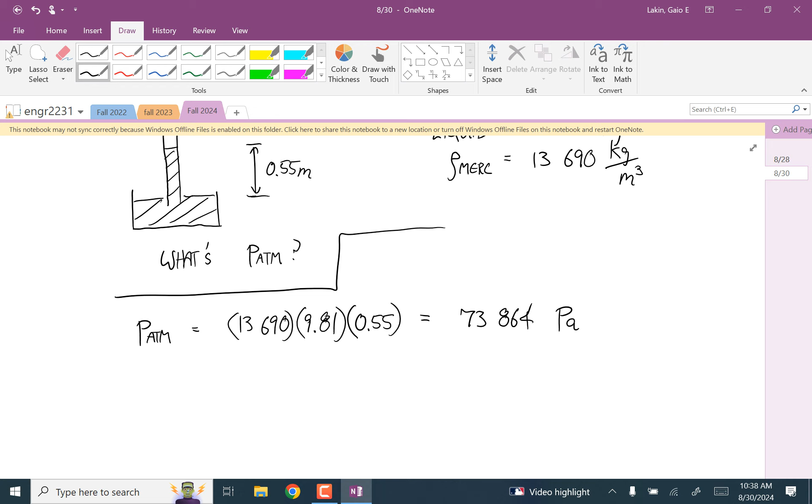And so the more dense the liquid, the more pressure is required to move it? Yes, that's correct. Any other questions about that? Okay, let's stop there.